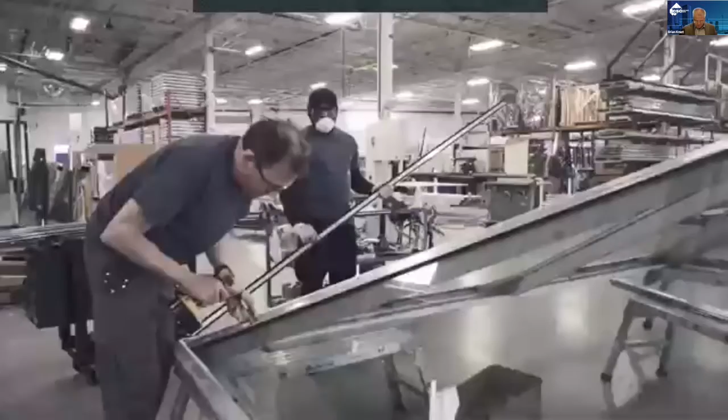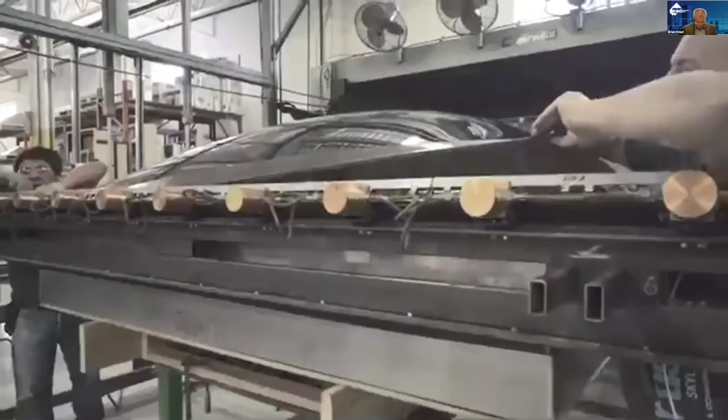Artistic Skylight is a family-owned and operated manufacturer of premium commercial, industrial, and residential skylights since 1980. We are known in our industry for our unique niche products and craftsmanship with in-house design, lean manufacturing, and certified experienced installation capabilities. Currently, Artistic Skylight has implemented a new strategic plan to support its growth and an export plan to obtain a more dominant global market. With our headquarters located in the city of Vaughan, we are proud to be part of this booming business community.

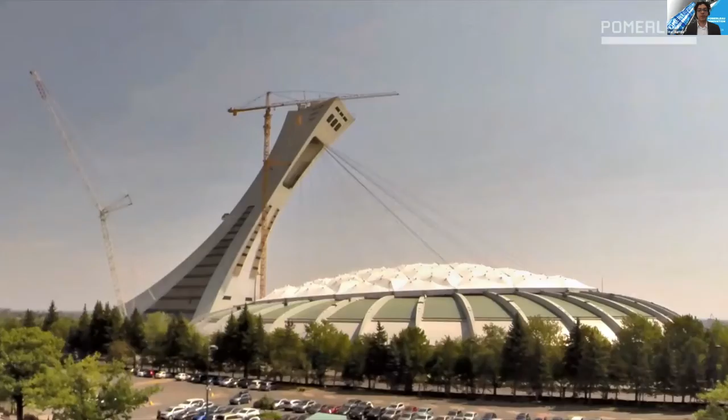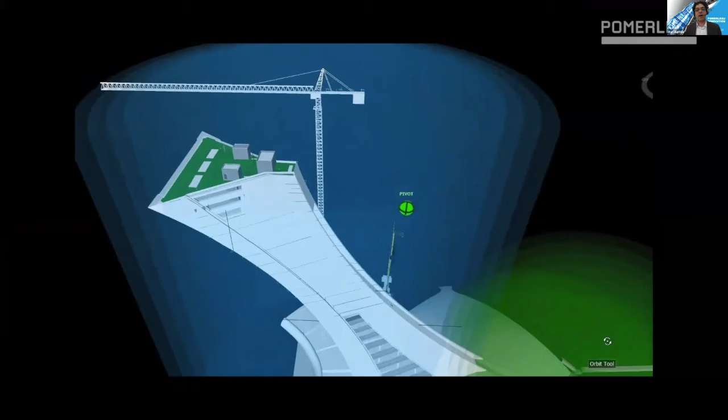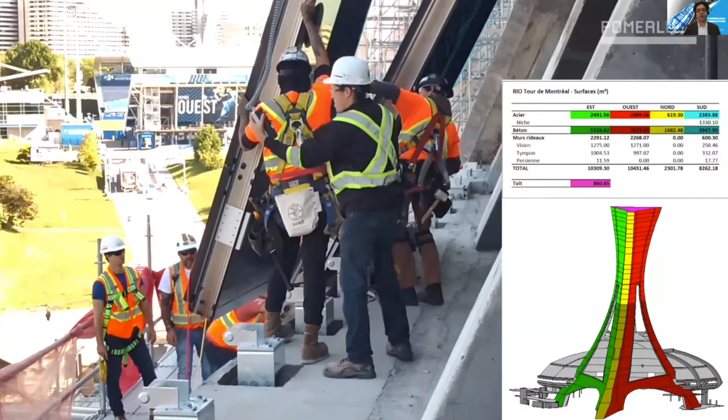It's used across the board when it comes to better understanding our projects and implementing these technologies, not only in the planning process, logistics planning, but also in how we build, so that we are building more effectively. We're optimizing our construction schedules and using different technologies at different aspects and stages in construction.

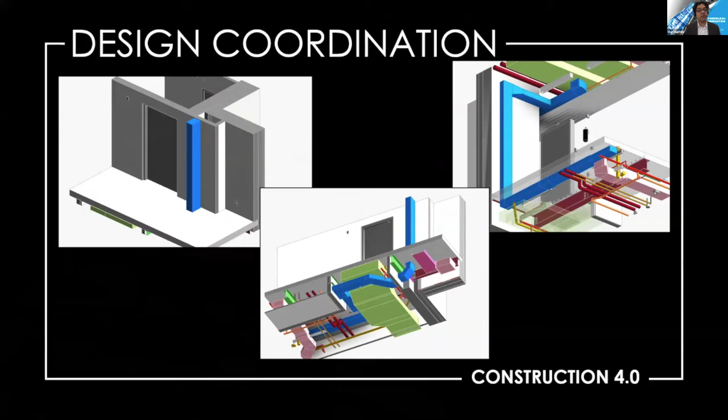So today I will jump into some of the ways that we use technology regularly on our construction sites, obviously starting with the basic use of our 3D models, which is design coordination.

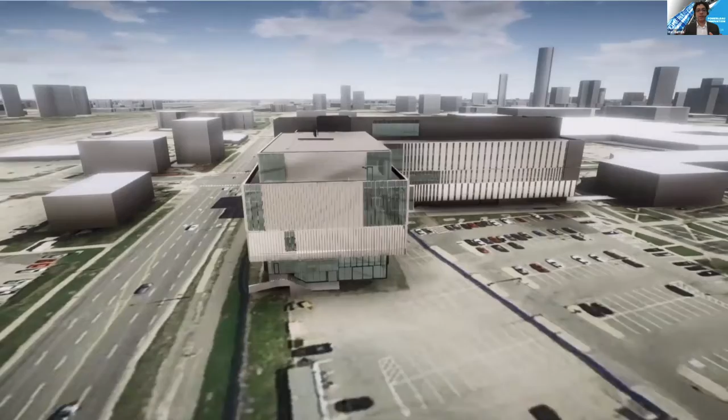We take that to the next level at Pomerleau, where we're not only coordinating our design with our design partners and with our subtrades effectively, but we're jumping into that with all stakeholders on the project, whether it's owners or operators and users of the building.

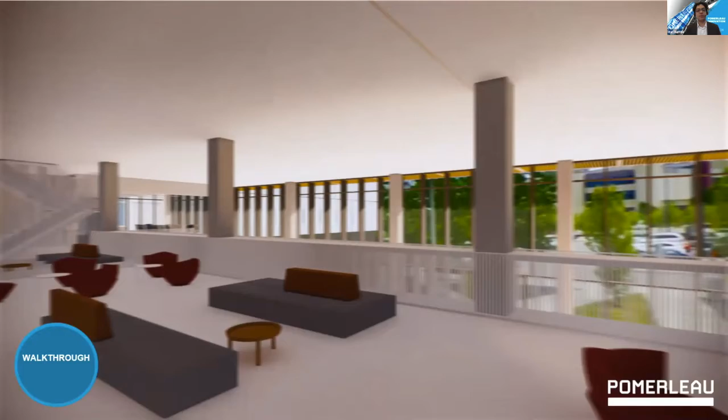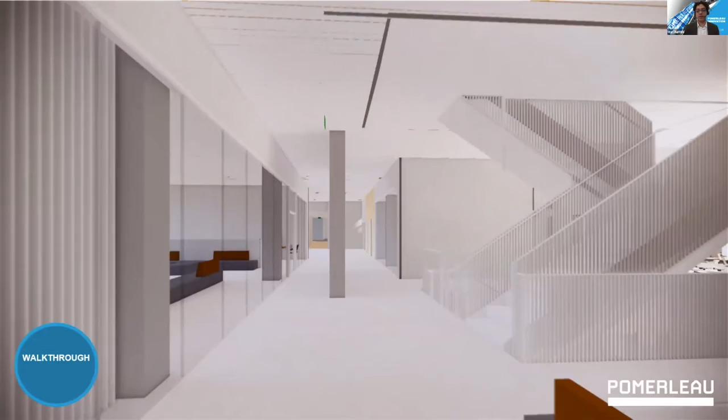We're able to walk through our construction models very early in the construction stage to ensure that the information is shared and the knowledge is shared, and that's the key, the important part there.

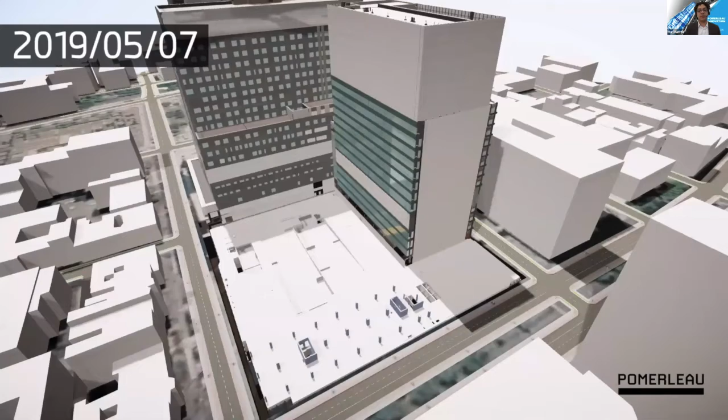We also take that to the next level using digital technology, and we do 4D technology, 4D construction on our construction sites. The 4D construction again is staple for the way we build.

It's to better, not just for us to better understand how we're going to tackle these construction projects, but to share the knowledge and the plan essentially of how we want to tackle construction.

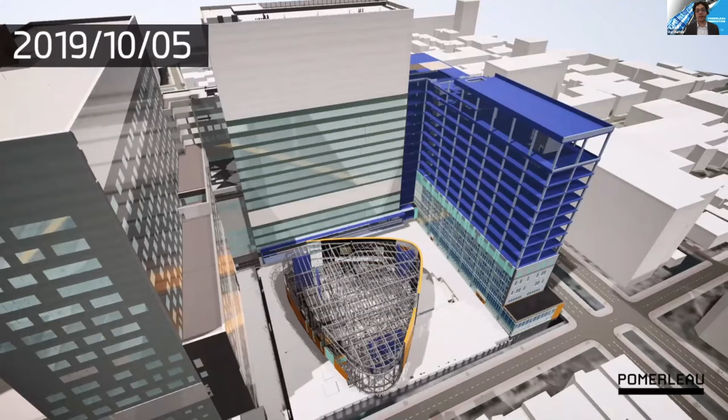It's that sharing of knowledge that is really helping us grow, helping our project teams grow, but also helping the industry grow, because we're sharing this information with our trade partners and owners and all stakeholders on the project.

So you can see we even take it to the level where we have weather effects added to our construction sites, and that helps better understand at what stages our construction is happening, and to really look at these 4D models not just as an animation of construction, but essentially a true breakdown of our construction schedules month by month, even almost week by week, so you can see the entire building being built.

We also use VR technology regularly in our processes. We've developed in-house certain advancements in the technology so that we can show our stakeholders optimal paths for pedestrians around our construction sites.

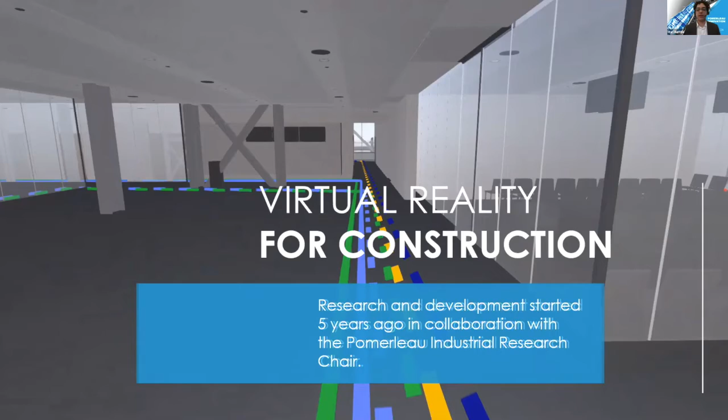So not just to visualize the construction and what we're going to be building, but to visualize the space around our construction sites. We're able to take that VR technology right to the site team and walk through the construction effectively, using new developments we've developed in-house for location, but even for measurements and coordination applications, where we can measure from these model spaces in the VR space as well.

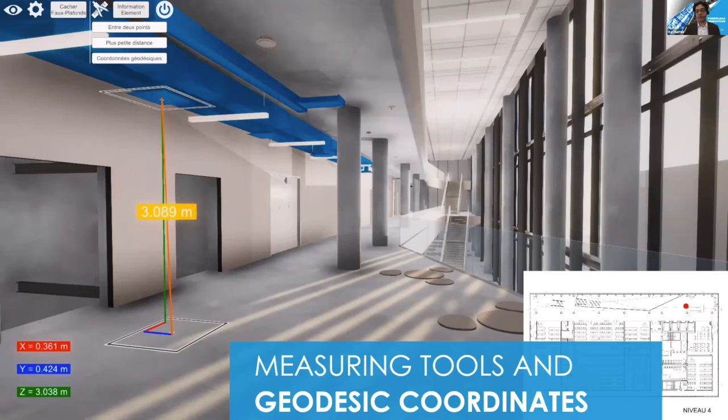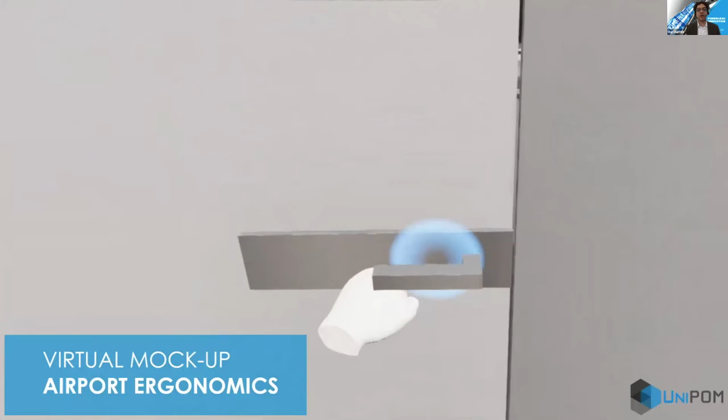The next step for coordination is bringing that to the end user of these buildings. So we use the VR as an interaction with the end user so that they can interact with the building we're going to be building for them, whether it's moving chairs or opening doors.

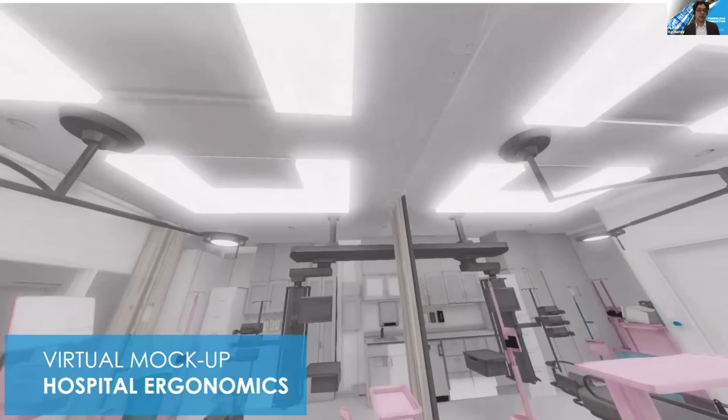They get a better understanding of how the space is going to function, and all of this is to optimize the entire construction process in terms of RFIs, changes in design, and that, as you'll see a little bit later in the presentation, is going to be very important for some of the advanced technologies that we're starting to use.

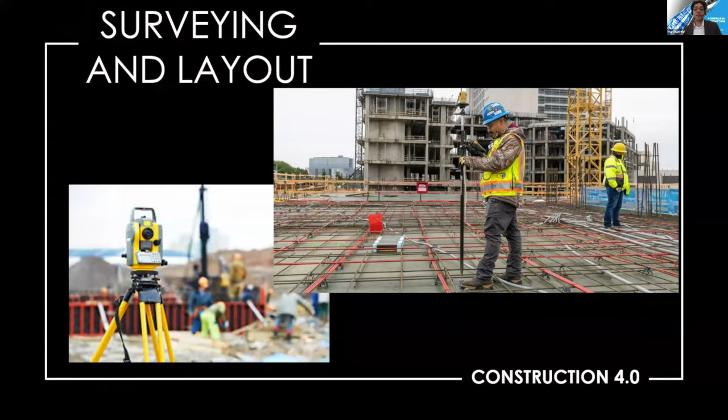So when it comes to surveying and layout, this is now taking the technology from planning and digital to what's happening on our construction sites. Our innovation team, as I mentioned, is involved in every stage of the process.

We do 3D scans of our construction sites to gather information. We do the data acquisition as construction is progressing, and we work with our subtrades. Whether they're using this technology or it's us, we foster the sharing and collaboration of information to make sure there's that effective transfer of information throughout the entire construction process.

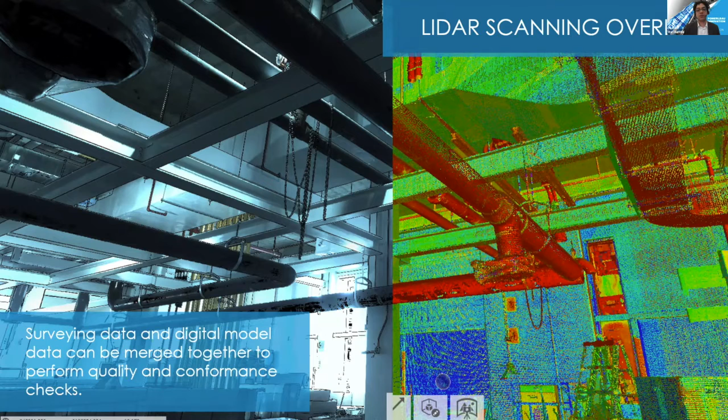This is another way where we're catching information from our sites using 360 cameras, and these cameras are used in comparison to our 3D model, which is essentially the finished product, to better understand where we are and where we need to get to.

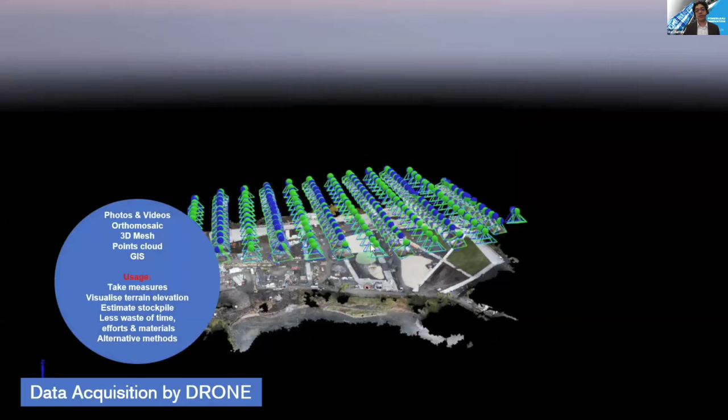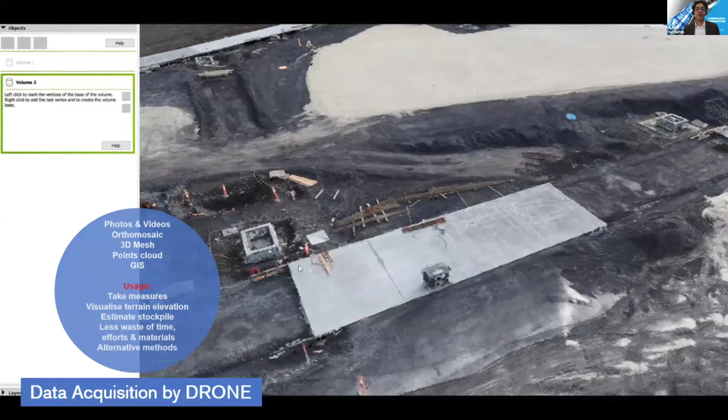Drone technology is another way that we're capturing information from our construction sites as they're happening. We take the output from our drones and do analysis on that data coming in from different aspects, whether it's a drone, camera, or scanning. The information we gather is usually quite accurate and very usable in terms of data, and this data can effectively optimize our entire construction process, then be shared with the end user, which is up next with the facilities management section.

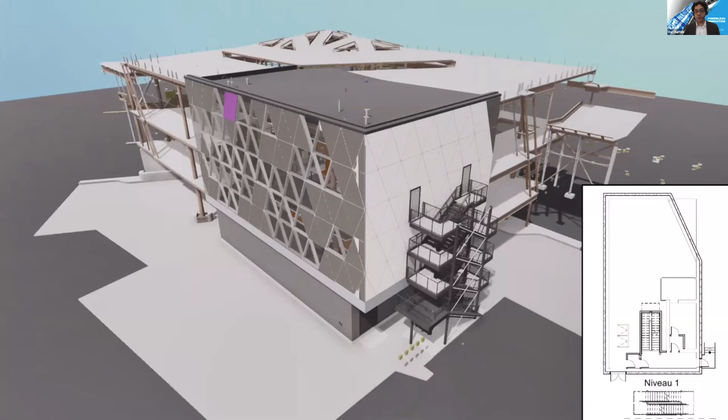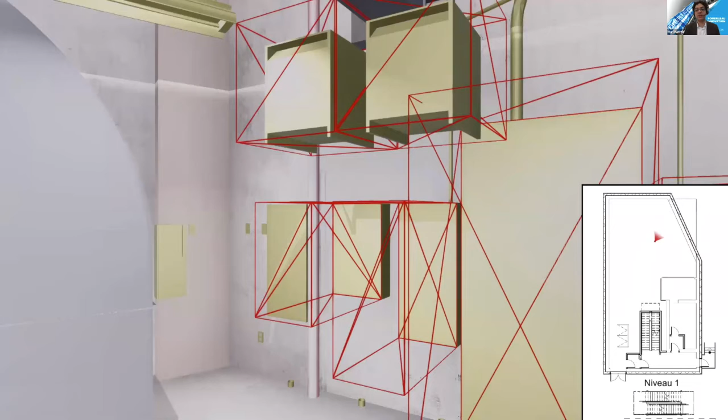All the information we gather from design and construction, we're transferring to the end user, the owners of these facilities. We make sure that during design, the end user understands what we're going to build, confirming that what we build is essentially what they need, and exactly how they're going to use the different systems at the end of the construction. With VR sessions, we go in with the operations teams of the buildings and make sure the final product is optimized to their usage as well.

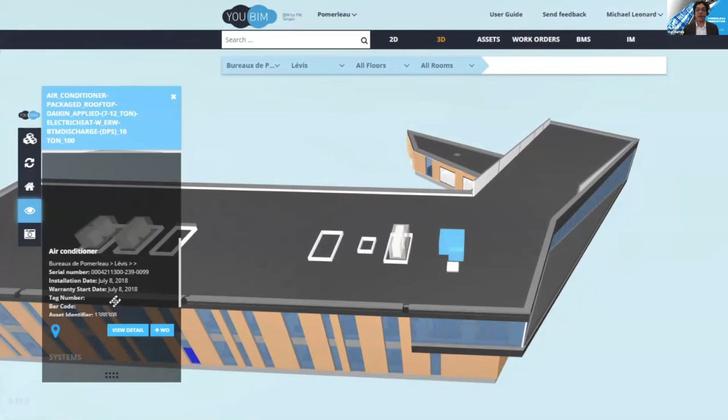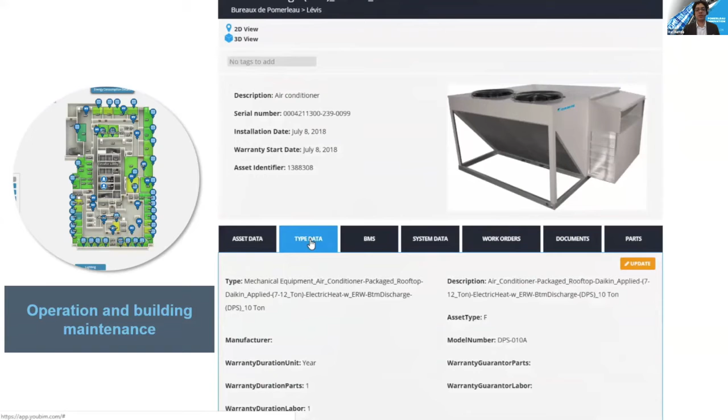Here's another example of how we take information from construction and even the commissioning process. We take the spec data from each of our equipment, input it to our 3D models, and make links between warranty information, spec information, and any other data collected throughout the commissioning process, then transfer that information digitally with our 3D models to the end user.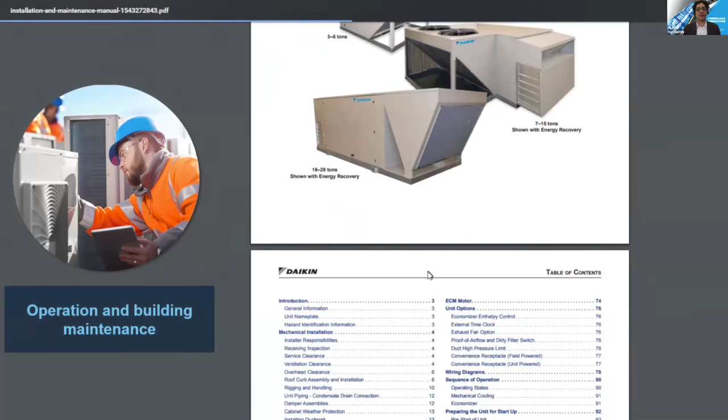Now I want to show some of the advanced technologies we're able to do now that we've created a solid foundation of all these different technologies I ran through. We take that foundation, and right now we're able to do research and development on new aspects, new technologies, new innovations in our industry, be it prefabrication or using sensor technology and the Internet of Things, IoT.

We want to really better understand our construction sites, acquire the data that is being generated throughout construction, be able to analyze that data through artificial intelligence, share that data with manufacturing, whether offsite manufacturing or even robotics on our construction site, and push that to the next level of how we're going to build in the future.

We're doing effective research and development in offsite construction, where we're better understanding how to plan construction so it can be built in a factory. All of that analyzing of design, quality checking our design, is used to finalize the design at a point where we can fabricate in a factory and deliver to site for installation.

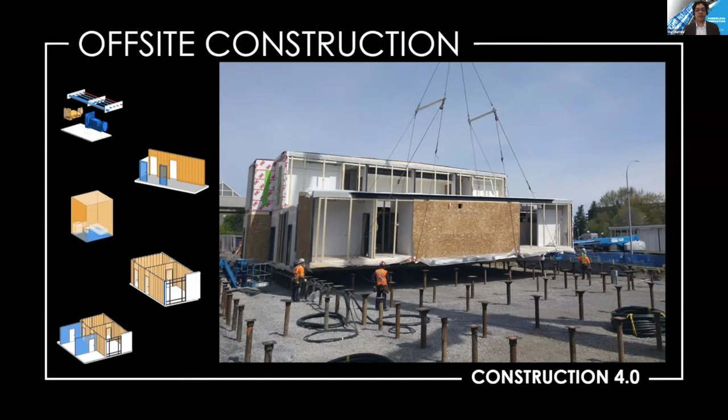On the installation part, we're using the surveying and quality checks we've been using on all our construction sites to optimize the execution of these prefabricated modules, to make sure the quality and accuracy is exactly where we need it to be to build offsite.

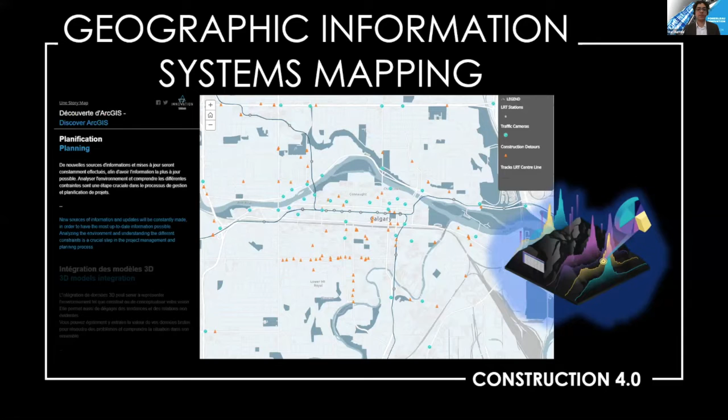We're using geographic information. All the data we're collecting from different construction sites, we're able to visualize geographically. So not just looking at one site level, but taking that to the next level, looking at large maps, different construction sites, historical data acquired from previous construction, and linking that to maybe new construction in the same area or region, using GIS, the Geographical Information System mapping, to optimize the use of data.

Robotics is something quite new to the construction industry, and we're working with innovation partners. Boston Dynamics has shared their SpotMini robot that we're currently piloting on our construction site to optimize certain processes throughout construction, to see how robotics can mix with our on-site teams.

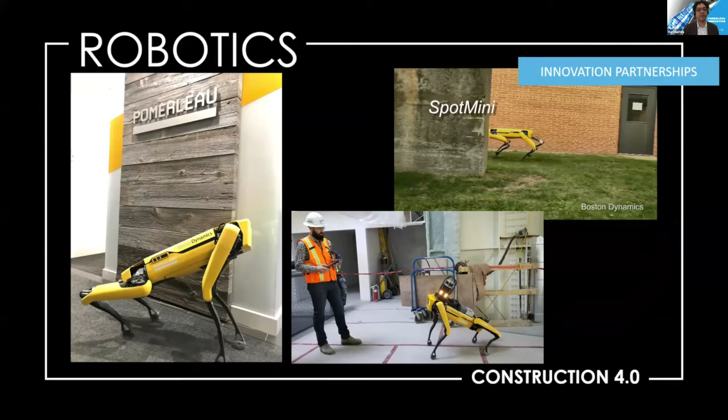Lastly, we have development in IoT, tags, and sensor technology, very relevant these days when it comes to contact tracing and the situations we find ourselves in. So even with new problems, we're finding new solutions to how we build on construction sites, and we take that to the site teams to test and pilot.

So thank you, that's the end of my quick analysis of Pomerleau's innovation strategy, what we're doing and where we're going, trying to get us to a way of how we're going to build in the future. We really don't know what it's going to look like, but it is exciting. So thanks, I'll pass it to Brian.

Thank you, Yuri. But definitely some interesting material there.

My presentation is going to take a bit of a different focus. I'm going to focus on one of the technologies that Yuri described at the end of his slides concerning IoT. PCL has released to the marketplace and is using internally a product that we call Job Site Insights.

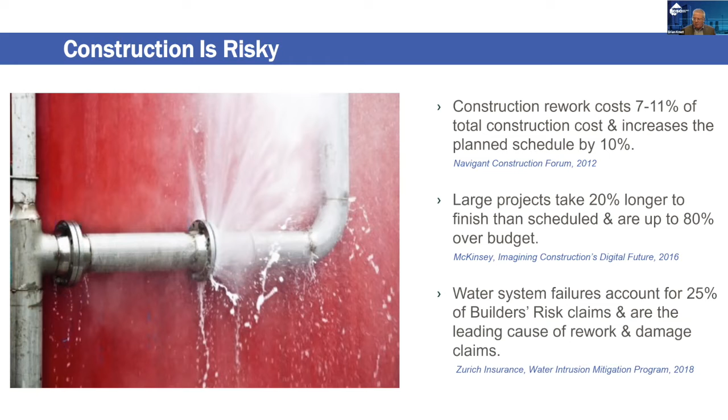Of particular interest, JSI addresses water damage. Water damage on construction sites is the leading cause of builders' risk claims. Here at PCL, and I'm sure at Pomerleau and other organizations, the evidence bears it out in the risk management data and the claims data. So we really wanted to build an application that addressed all of the issues on a job site, and we saw IoT as the vehicle contributing as a tool set to do that.

Really, Job Site Insights' innovation and its value to the job site is directly that. We have to show results with these products in terms of advancing schedule, reducing costs, improving our build quality. If you have damage on a job site from water damage, for example, that impairs your quality, that creates rework, which is costly. At the end of the day, if we can improve our profitability and reduce our costs and make our customers and clients happier with a better product, we've succeeded.

So JSI today is deployed across approximately 100+ projects in North America, Australia, and Europe. We have customers in those areas. Of course, most PCL job sites, depending on their nature, are utilizing JSI to protect against these adverse events.

So really, how does this work? We deploy wireless IoT sensors on the job site that are ingested in the Job Site Insights platform, a cloud-based application that runs actually on Microsoft Azure technology. That is its technology foundation. That data is analyzed as it's incoming and looking for anomalies and events or conditions on a job site, such as freezing temperatures, water leaks, wind conditions that are impacting safety or could impact safety. I've got a slide where I'll describe some of the sensing capabilities of the platform.

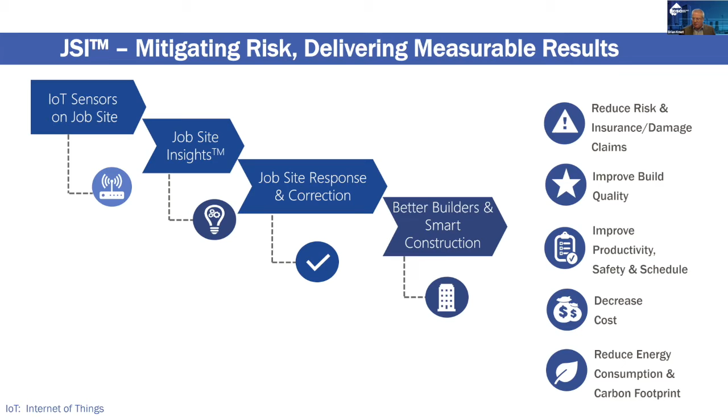At the end of the day, I think Yuri talked about this technology and others making the industry and PCL better builders, and what we'd call smarter construction. I come back to McKinsey, who I believe in their study ranked construction out of 22 industries, second from the bottom in digital maturity, slightly ahead of, I think, hunting and gathering, if I recall correctly. So it's interesting that we're a laggard, and I think innovative solutions such as Yuri's describing and Job Site Insights are really moving the needle in terms of the industry's digitalization and ability to use technology more effectively.

And of course, job sites are mobile. Construction personnel do not carry laptops around, they operate with the phone. That's the most significant part, in my opinion, of JSI, the mobility factor - we're giving tools to the job site where the phone is a popular item to be used, as is an iPad on occasion, but the phone is the number one vehicle for communication, data, and interaction with these things.

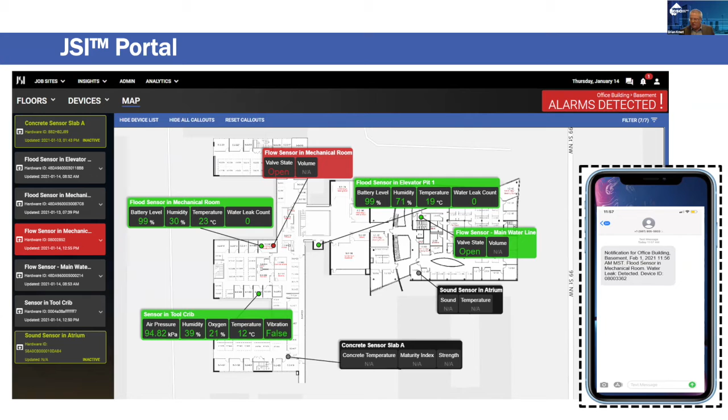Similarly, they can set up alerts, they can set up teams. You want to notify a construction team of an event such as a water leak in the mechanical room, and those alerts are sent out, and they can do that on their phone. They can also do that in the main application. And as you see on the right-hand side of this slide, most of the functionality found in the web portal is found on the mobile device.

So, where have we used this, and what are some use cases of IoT technologies on the job site - this early warning system of adverse events? The most popular sensing capabilities are, arguably, for freezing temperatures. It's gotten cold here in Edmonton, as we all know, and elsewhere in the country. So freezing temperatures lead to water damage typically, and the case studies illustrate the results we've achieved on job sites.

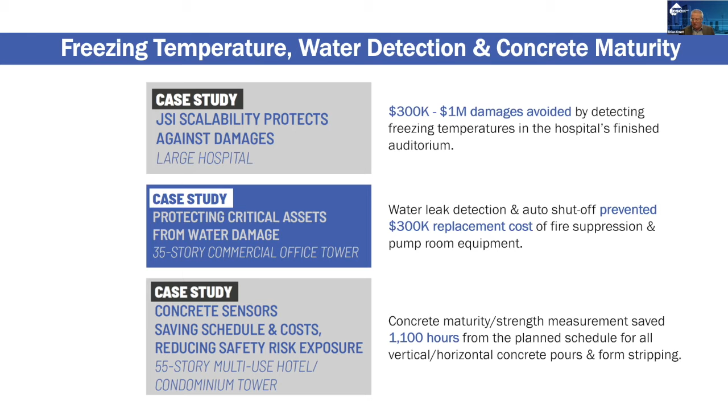I've got some details on that particular case study, the ICE district here in Edmonton, the two towers that PCL built on the left and the right. It was actually the first job site deployment of JSI a couple of years ago, and we achieved a 10x return on our $46,000 investment in temperature and humidity sensors, which were expressly used to monitor conditions during the finished construction work. There was a lot of high-end materials, expensive millwork in this structure, and the $175,000 budgeted for millwork damage, included in the estimate, were never realized. So we had significant savings there.

And because of temperature sensing, we were not running heaters continuously in the cold weather, which is typically the case on a job site. We realized significant energy and carbon fuel savings by not having to do so.

And we've done that now on the job site by monitoring that strength and maturity in real time. So we saved not only schedule, but we had quality improvements as well.

Third-party testing can be fraught with errors, as you know—there's improper handling of the cylinders on the job site, inaccurate cylinder breaks performed at the wrong time. And then lastly, the safety implications.

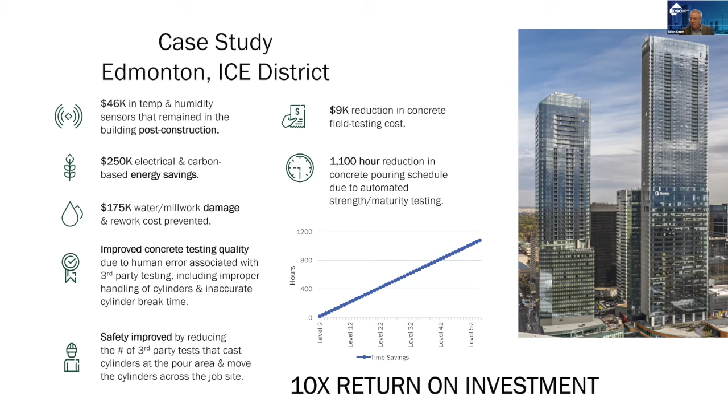IoT data is pretty simple. It's time series data—that's really what it is. And we have descriptive analytics. We can show the data that's occurred from the IoT sensors, such as temperature history. That has actually proved valuable.

Surprisingly, in Ontario, we had a project where a construction worker lodged a complaint with the Ministry of Labor concerning temperature on a job site. The inspector showed up at the job site. The superintendent displayed the analytical results, the historical reports of the temperature, which were within the acceptable parameters, and the complaint was dismissed. So that evidence-based approach to managing a job site is certainly valuable.

And now you get into the predictive capabilities and the prescriptive capabilities. For example, we can now predict with other data sources the probability of safety incidents, and we're seeing that in the marketplace. There are organizations offering these solutions, and we've decided to do a lot of that on our own, as I'll show you shortly. But the fundamental point here is that we collect the data, we expose it through APIs to other operational, corporate, or even third-party data sources.